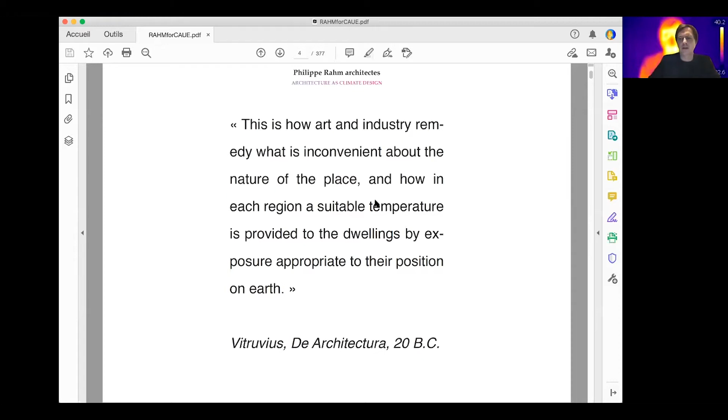Why do we really need architecture? Why are we building something? It's because we cannot live in the snow, in the coldness, and because our bodies need to keep the temperature always at 37 degrees. So the first reason of architecture is to create a shelter to block the sunlight when it's too hot, or to create a kind of microclimate around the body where you can reproduce a perpetual spring—a comfortable 20 degrees Celsius temperature around the body when it's very cold outside or raining.

So this is really the fundamental reason of architecture, the cause of the construction of buildings. I think it's very important to remember that today, because sometimes we lose the fundamental reason of something, so coming back to this climatic reason is something very important.

And then, so we can—sorry, I don't know what happened. Welcome back. Yes, sorry, okay, so I will continue.

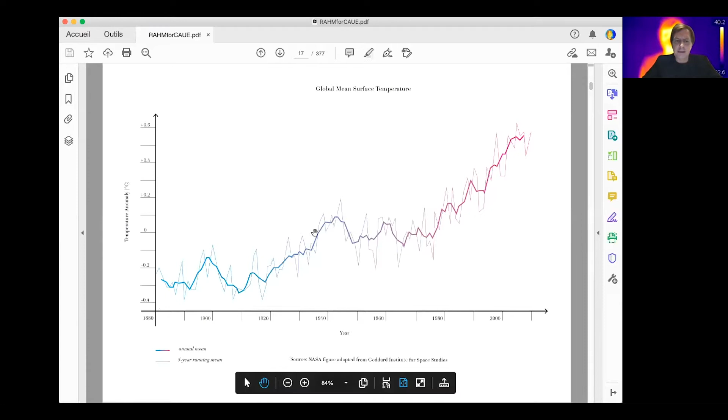So the beginning of when we start to emit CO2 by burning coal, then gas and petroleum, that produces emitting CO2. This was the real measurement of the temperature on the planet, on the atmosphere, and we can compare it with the CO2 emission that we can also measure since 1950. We have a real measure of the CO2 quantity in the atmosphere, which is more than 400 ppm today. Before that, in ice cores, we can also measure the quantity of CO2 inside the atmosphere. So there is this link between CO2 emission and global warming.

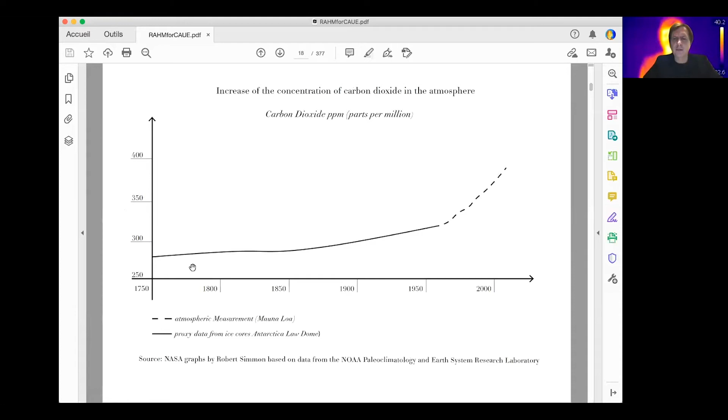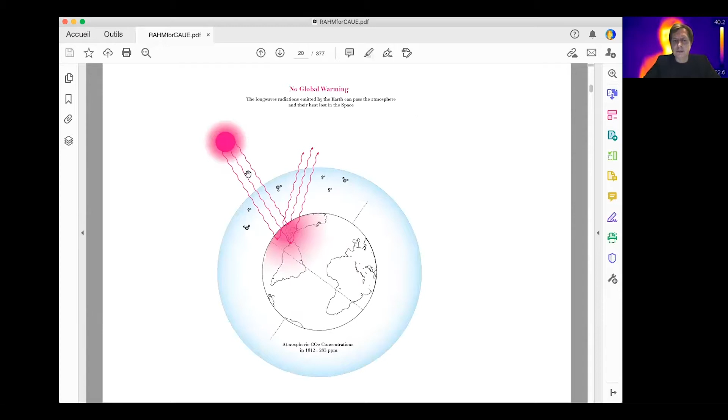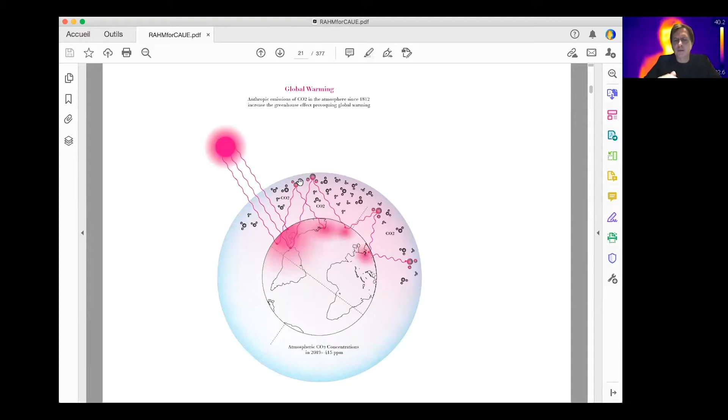And this is what we know from John Tyndall. John Tyndall, in 1850, showed that CO2 is transparent in the visible spectrum, but it's opaque in the infrared. And this is what happens: during the day, the Earth receives heat from sunlight and starts to heat up the planet. Then during the night, it re-emits some radiation, but this is no longer in the visible spectrum, it changes and is re-emitted into infrared. Because these infrared wavelengths correspond to the opacity of the CO2 molecule in the air, it starts to create global warming.

So the consequence of the global warming is what we all know today, the effect on environment, and then perturbations on the human occupation of the Earth, with different troubles that will grow with global warming.

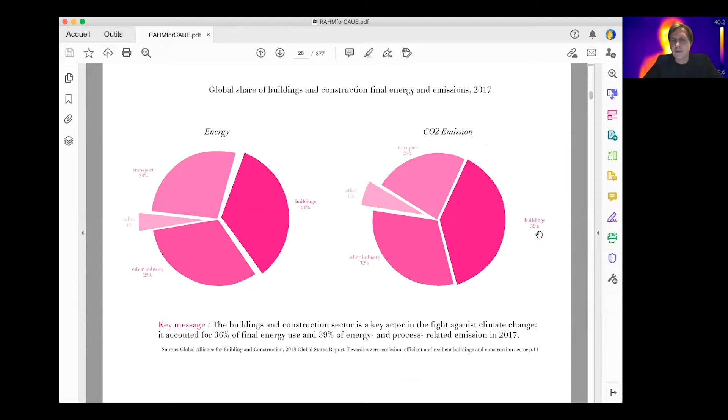So what are the conditions at the architecture scale? We have to understand the CO2 emission at the global scale - this is a repartition of the CO2 emission. We can see that buildings are producing 39% of the CO2 emission. In France, for example, people were talking a lot a few years ago about airplanes. Airplane is 2%, so it's okay, but buildings are 39%.

So it means the architects are really on the front line to reduce the emission of CO2. As architects, we are becoming political too, because we need to do something in our field, because this is the most responsible sector for creating global warming.

Then, if we look at where and when it's producing CO2, there is a new study published this year from Graz University. They did a study on 600 buildings about the repartition between building operations and material. When you burn fossil energy to heat your house, for the radiator or the hot water, it represents a large part of the CO2 emission. The material, whether wood or steel, also produces CO2, but it's only a quarter of that. So we can see here, this is quite interesting.

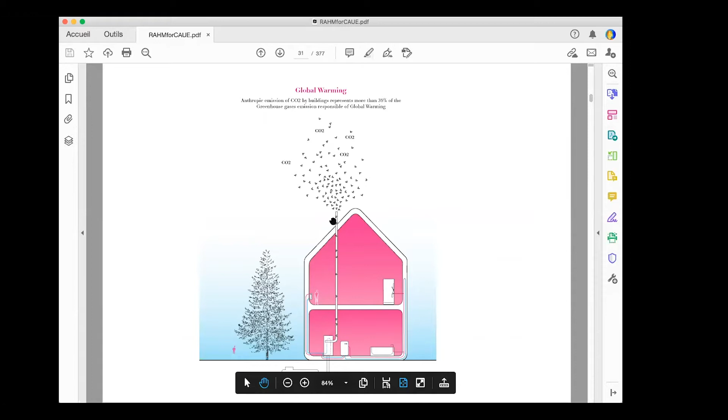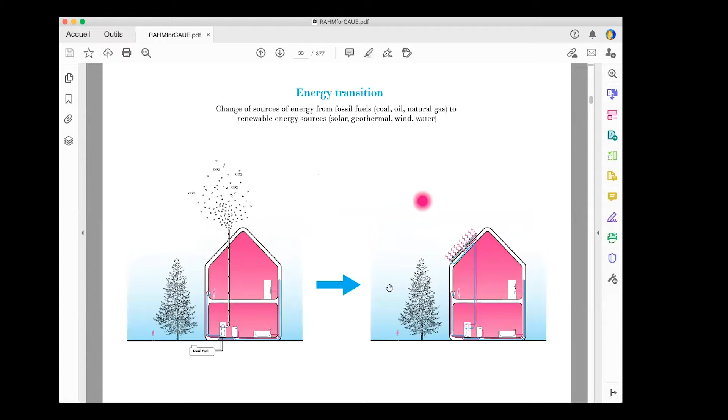But just to explain what's happened - before, or still today, we are burning fossil energy, so it produces CO2. In the future, we need to change and use only renewable energy. So this is the energy transition that we have to do. But this energy transition will take time. Maybe it can be faster, but people are talking about 30 years. Of course, I'm sure it can be faster, but why? Because today we still use the energy that we are using.

This is also a global calculation, because in Germany there is more use of coal, for example, for producing energy. And so at the global scale, it represents 85% still coming from fossil energy that produces CO2, and only 10% are renewable energy and nuclear.

So it means in the future everything should become renewable energy. But because today 85% is still coming from fossil energy, we have to decrease the consumption of energy. So there are two steps: first, we have to decrease the consumption of energy, then we have to change to renewable energy, and then we can use energy as we want in the future, because it will be no more energy producing CO2.

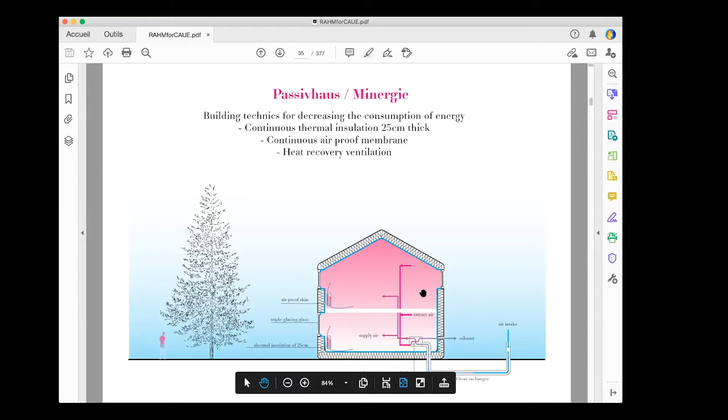So this is the Minergie Passive House standard, with 25 centimeters of thermal insulation, ventilation, and an air-proof membrane, things like that. And so in the end we can reduce a lot, and we can work on this operation part to reduce the CO2 emission, in order to reduce global warming.

So now we understand that the cause of architecture is climatic, the aim is climatic, the conditions today are also climatic. So what about the tools for doing architecture? When we are talking about tools in architecture, about composition, about form, about material, what kind of decisions can we make when we choose a form for the building, or a material?

And the two strategies that we have today are more like a geometrical strategy. We use a square or rectangle, or we like a form, and then we use addition of form, of squares, for doing a composition. And then when you choose a material, you choose it also through some cultural reference.

But in reality, why can we not also change this way of choosing material, of choosing form, through climatic parameters, and say that the means can become climatic. So this is the idea of meteorological architecture: to say the type of composition will be no more coming from geometry, but will come from meteorology, from climatology.

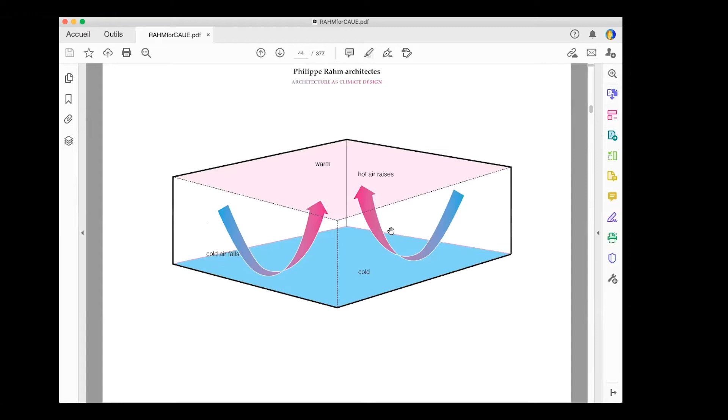The second element is convection. Convection is the fact that when the air becomes more hot, it becomes less dense, so it becomes lighter and rises to the top of the room.

And this is what happens in a normal apartment. This line represents the temperature. So it means at the foot level it can be 16 degrees Celsius, and then it can be 30 degrees Celsius at the top, under the ceiling. This is something that is quite strong.

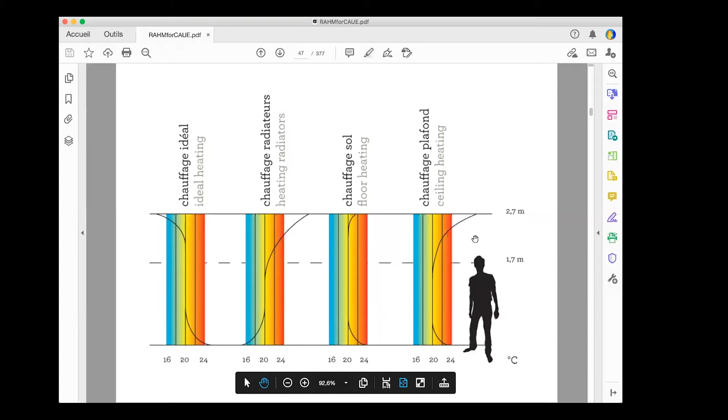So it means all this, because we are living down on the floor, we are losing a lot of energy by heating under the ceiling, and nobody lives under the ceiling. So you have a large mass of air that is very hot, and nobody uses it. It's a loss of energy because we are not heating where we need it.

And then there is also the fact that sometimes we are cold in the feet, and so we turn on the radiator, but in reality all the heat goes under the ceiling, and we still are cold at the feet level. So this is what happens today.

And so this is like a thermal representation of a section of a room. It's colder down and warmer up. So from that, we start to say, okay, we will use this Swiss recommendation, and we will use this Archimedes law of convection, atmospherical convection, and we will start to design the section linked to that.

We made a lot of projects based on this principle, but just to show with this section: here it's 22 degrees, this is more hot, and here it's more cold, and then it starts to create inside the atmosphere of the house a kind of variation of climate, and we place inside accordingly.

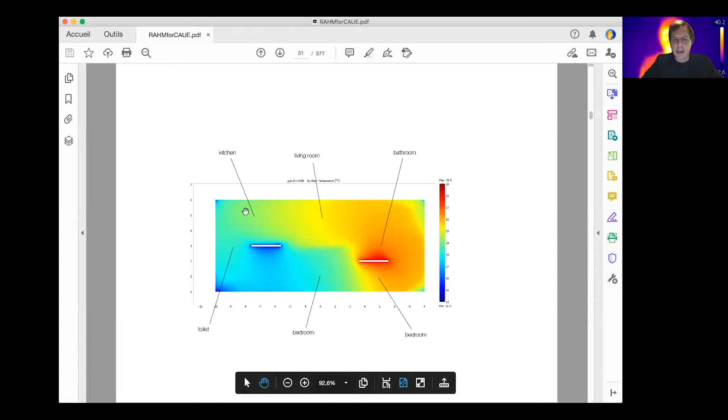We can see, okay, we can place the different programs linked to the different temperatures. So close here, we can have the bathroom, and we can have the bedroom here, the kitchen, the living room that find their place according to the temperature.

So this is what we make in this apartment in a very simple way. We know that it's more hot here and more cold on the floor. So we start to place the program linked to the temperature.

So we place the bathroom here next to the ceiling, and the kitchen down, and also there's just a funny decision about the sofa. The sofa when you are alone is a little higher than the sofa where you are two or three, because you are sharing the human warmth. So it means it can go down, and then very down we have the bed there.

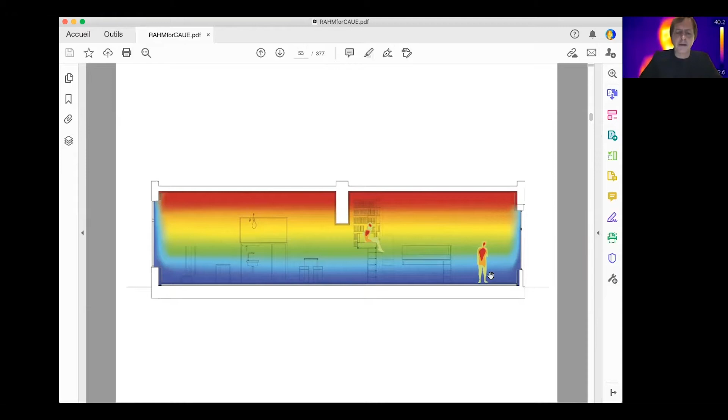Then there is another phenomenon: evaporation. We need to renew the air inside the apartment because we are producing moisture by breathing, and it depends also on the activity we have. If we are sleeping, we produce only 40 grams during 1 hour. If we are in the normal position, we are producing 150. If you take a shower, you are producing a lot.

And so it means the ventilation should be designed so that you don't introduce so much new air into the house, in order to reduce the heating of the new air that can be cold in the winter. So you will reduce the quantity of air by introducing it first in the bedroom, because there is less humidity, and then it goes to the living room, and then to the bathroom.

So it means that there is a kind of wind inside the house that is linked to ventilation, but it's good that the wind is always in this direction and not in this direction, because you don't want the bathroom moisture to go to the living room, or the toilet smell and odor to go to the living room or bedroom. So this is what happens.

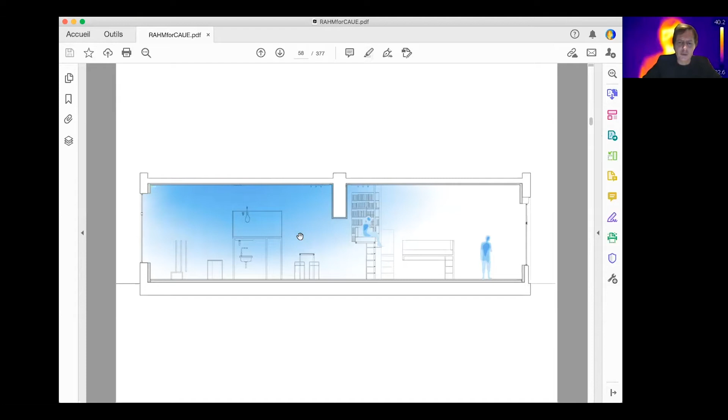So in the section we do something like that from the area here, and so this is like the wind is going like that.

So this is some view of the apartment with this. We use the verticality of the space for placing the different functions inside. Here we can see the ground of the bathroom. We have a grid that lets the air always go through. We don't have to block the air, so the air has to move freely everywhere.

And so this is some image of that. We can see here the shower, and that is on top of the kitchen.

And yeah, some view of the apartment.

Okay, now another project based on radiation. So all radiation can become the design tools for doing the plan of the project.

This is an exhibition space for the Luma Foundation in France. This project was made in an existing building of 2,700 square meters, with a skylight here.

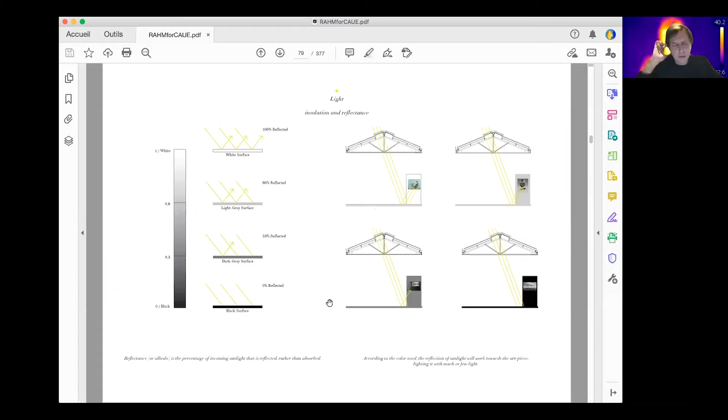So if we're talking about light, in reality there are two types. First, the insolation light, which comes from the skylight. Then we have the reflectance - depending on the color of the ground, if it's black it will absorb everything, and if it's white it will reflect a lot.

This means you can double the quantity of light by using a white floor, or decrease the intensity of light with a black surface, and in between you have a kind of gradation.

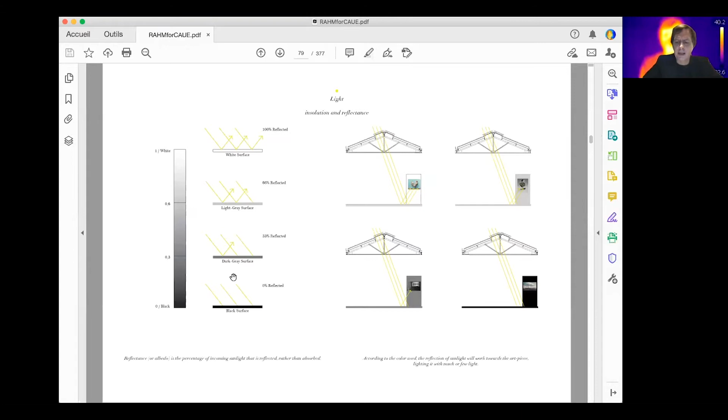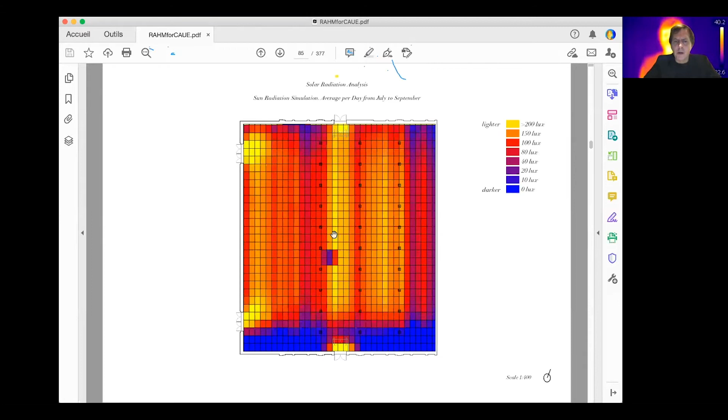And from that we transform it into a line, following the gradation - the gradient light where it's very yellow becomes that, then lighter, darker, black in the dark area.

And from that, we transform the type of floor - where it's very bright we can have a lot of light and increase it by adding a white floor. When it's already dark, we increase the darkness by creating a black floor.

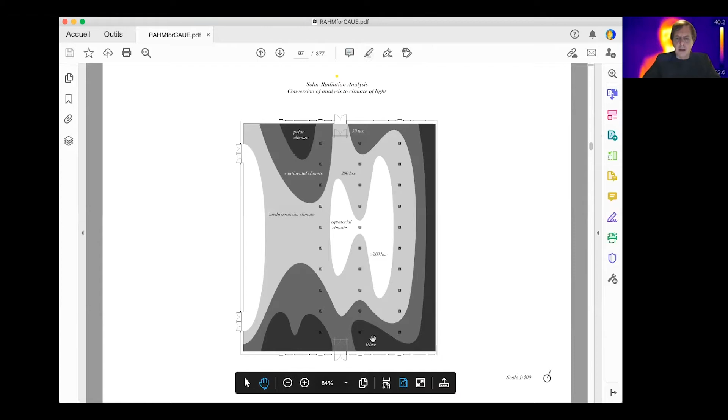So we transform this into a line, and then we have the section. The wall also follows the same principle of color.

And this is some view of the space at the end, with this variation of light linked to the different types of color of the ground.

In reality it was quite strong - it became very bright when it's white and receives light, and it was also working from a thermal point of view. It was not really what we wanted, but it was really interesting.

It was a little like going under the sun and going more into the shadow. It was like creating a kind of natural landscape with different light qualities.

And all the artwork have different types of light quality corresponding to the artist's will, or to the type of material.

Another point - here I was talking more about form, how to design the form of the plan or the section linked to meteorological phenomena. Here we are also working on the choice of material linked to some climatic value of the material.

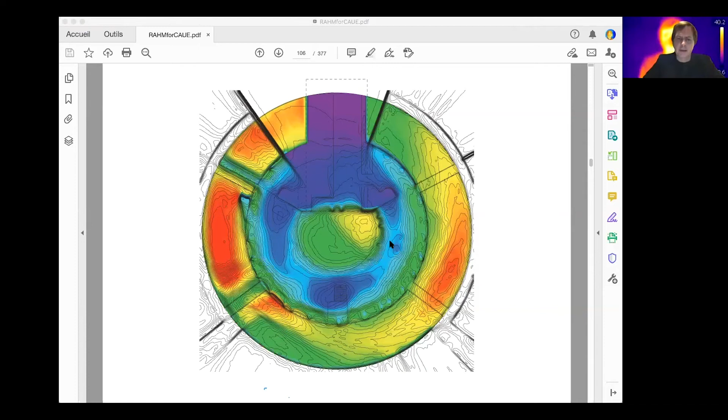So we say, in reality, the cafe cannot have a single place. It should be a gradation of atmosphere - a hot location for the winter, and a cold shadow location for the summer. So we made the average of the light, the incoming light in this space, and then from that we transform it into some lines, following the geometry of the building.

And then we start to create some different areas. So the space is defined by following the different zones - where it's green, it's more light, than where it's blue, where it's more shadow.

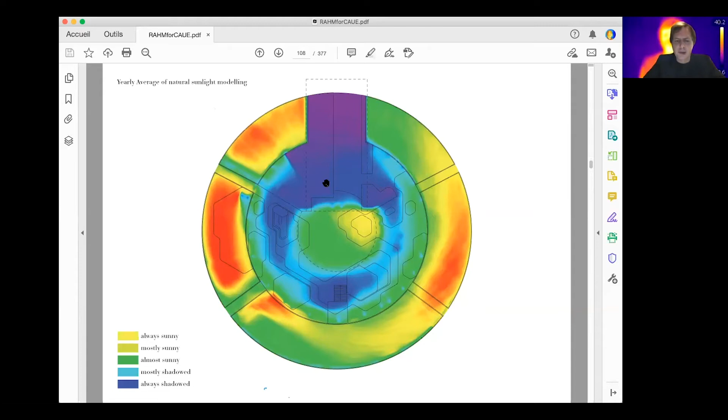And then we transform this line, this form, into the choice of material by saying, okay, in the winter, where there is more light, I want to have material that has low effusivity, so that I can keep my heat on myself. And in the shadow area, I will use a higher effusivity material. So this is the choice of material we have.

We create this gradation between metallic and stone and wood and wool. And of course, when you touch wool you feel it warm, and when you touch steel you feel it cold. So this is the decision of the material, and it's interesting because if you look to the history of architecture, you can understand that the choice of marble in the Italian church was also a decision of cooling, by effusivity.

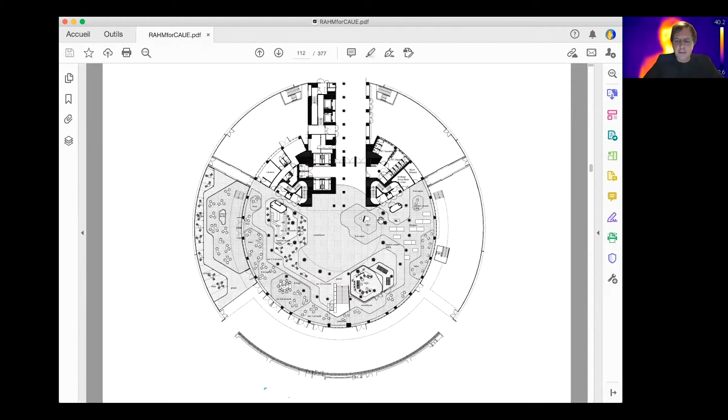So this is a plan. You can see the form of the different areas that are following the light distribution inside the space, and each line corresponds to one material - like the wool, and then the wood, and then rubber and stone and metallic material. So we can see now some images of the project with this wool area and wood.

And then we also decide, okay, this is the type of furniture that is protecting furniture, and then you move to the stone area where it's less light, so you are more in the shadow, and then you find the most colder area in the steel area. So what is important is that the decision of material - you choose a material linked with this capacity of cooling the body or keeping the heat of the body.

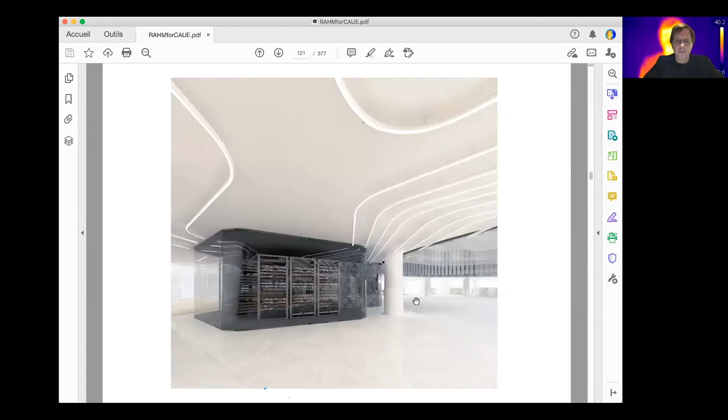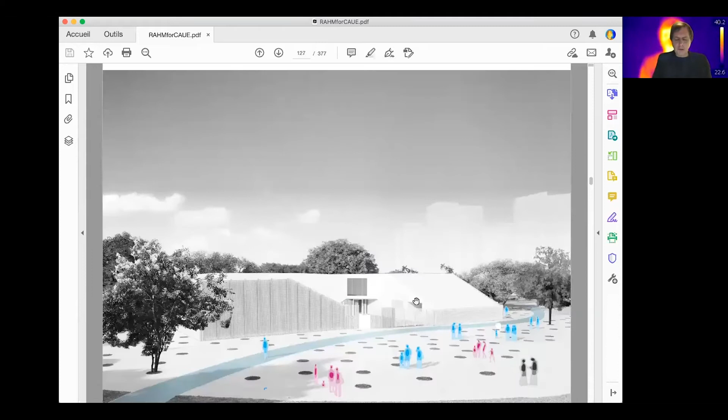Now I can talk about conduction. Conduction is more linked to thermal insulation, but today when you are talking about a wall between inside and outside, before it was one material, but today it's no more one material. It's made of thermal insulation, vapor barrier, rain barrier, load bearing structure, or a screen, some physical barrier. So in reality, the wall today is composed of a lot of layers.

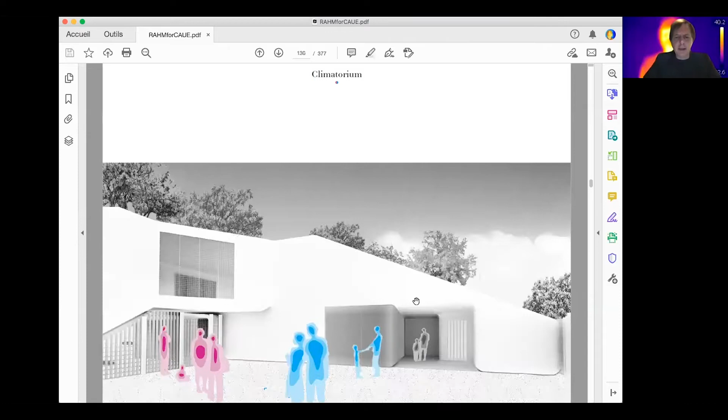And what we propose in this building is - normally everything is together, inside and outside. And here we propose to split the space, to create some space in between. So this is a little way to start to inhabit inside the different layers, to find in between the waterproof and the thermal insulation, or in between the thermal insulation and the load bearing wall.

So we can see the different layers that are splitting and creating space in between - living inside the thermal insulation, or between the vapor barrier and the thermal insulation. Here we can see all the layers together, but then here there is only the grid, which is a kind of physical barrier, and then the waterproof, and the thermal insulation creating a space. And then we have here the concrete wall that is supporting all the building.

And of course, when you open some space in between the physical barrier and the waterproof, you create a courtyard. And in between the waterproof and the thermal insulation, you create some space that will not receive air conditioning in Taiwan - it means it will be only natural ventilation here. And then the air conditioning will be only in the core of the building where there is thermal insulation.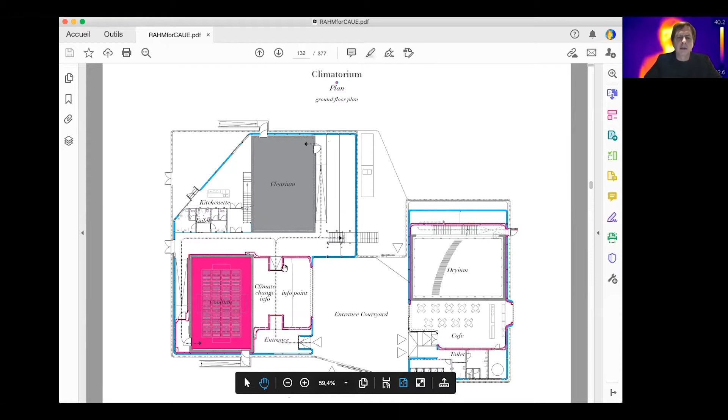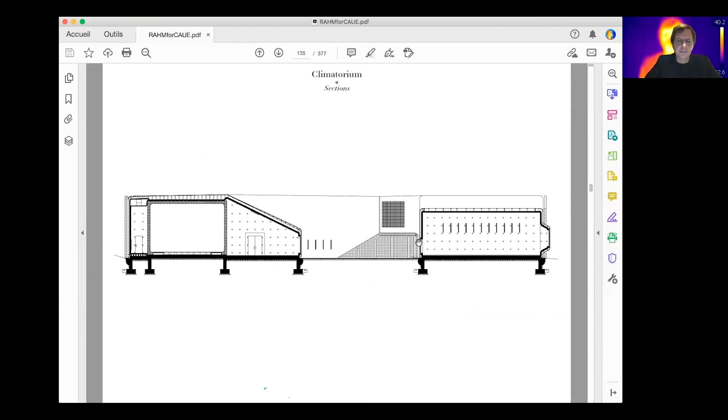So we can see it from a construction point of view. Here we can see the grid and the waterproof, and then here the thermal insulation here that stops here. Here the waterproof is continuing, so we are in between. And then the detail is like that. We have the physical barrier, the waterproof, the thermal insulation, and then it moves each from each other to open some space in between.

So the first layer is a waterproof, but it's also a kind of sunlight barrier, and we choose it with the albedo capacity, so it's white in order to avoid the overheating made by the sunlight, and we can see the building now with this white surface that is reflecting with this high albedo.

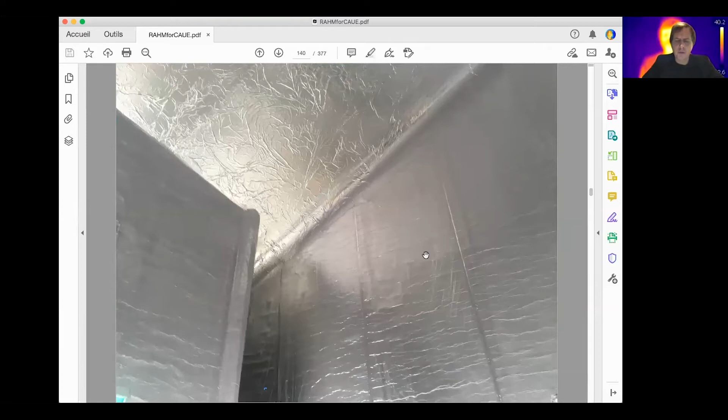And then we go inside the waterproof. We choose also the material linked to emissivity, because the aluminium here is not emitting infrared radiation, so it stays cool when the temperature of the air is warm. This is what we can see here.

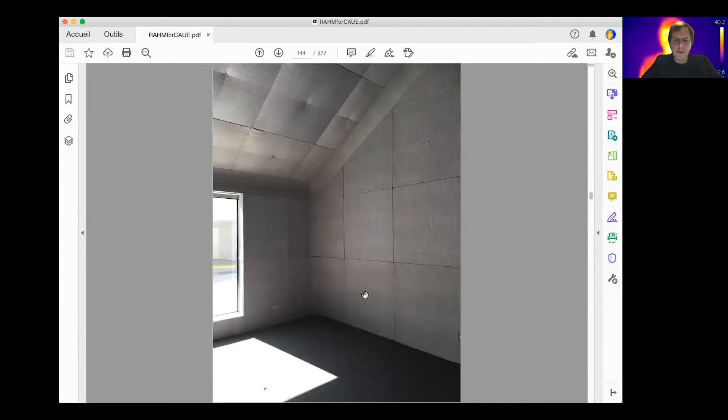And then here we are in between the waterproof and the thermal insulation. So this is all the corridor. It will be not, because it's a building made in Taiwan, in a tropical, hot and humid climate, so it will be not very comfortable here because it's warm. The air is warm, but there is only natural ventilation. But you don't stay a lot of time inside the corridor, so we can accept to decrease the consumption of energy and not cool all the toilet, the storage, the corridor, the entrance, all the space where we are not spending a lot of time. And then here we are entering into the thermal insulation inside the building.

And in this building called the Climatorium, we have 3 rooms, the coolium, the dryum, and the clearium. And these rooms are taking this issue of climatic issue, about heat and temperature with the coolium, about humidity of the air with the dryum, and pollution with the clearium.

And so what we propose is to have some kind of public space, because this building is a visitor center of the park. So it's become a kind of museum of climate, or conservatory of climate, but it's also a public space that hosts some space where you can go inside when it's too hot outside. It has a little the function maybe of the swimming pool, or the church when at the basilica - it was some cold space when it was too hot outside.

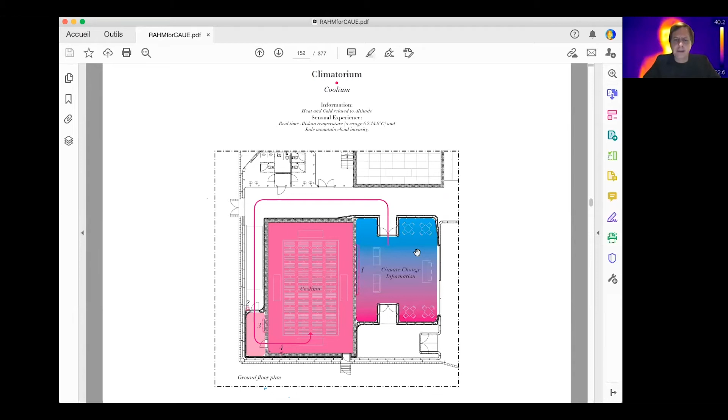And so for the coolium, we propose to reproduce in real time the climate of the mountain in Taiwan, by reproducing the light and the temperature of the mountain in real time. So it will be very cold inside this space when you will enter the space.

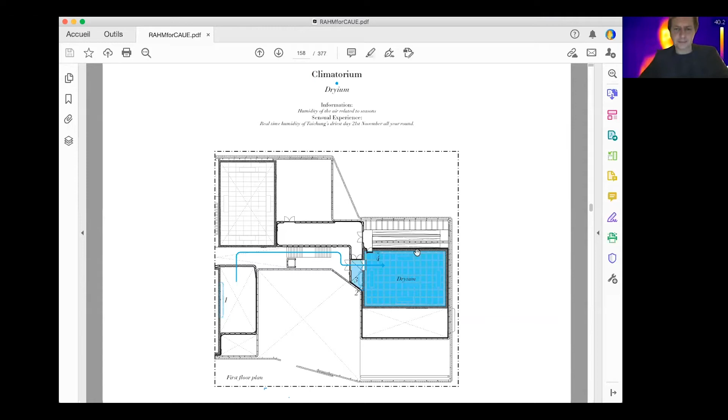In the dryum, we propose to reproduce the dry climate of the most dry day of Taiwan, so it's more in November. We can see it here. So this is like a never-ending day. So it means we propose to have a floor with a glass floor, and we do the sun pass of the 21st of November, when it's more dry, and when it's more dry, you can sweat more and you can cool the body by sweating more. So this is like reproducing every day the same day of the 21st of November.

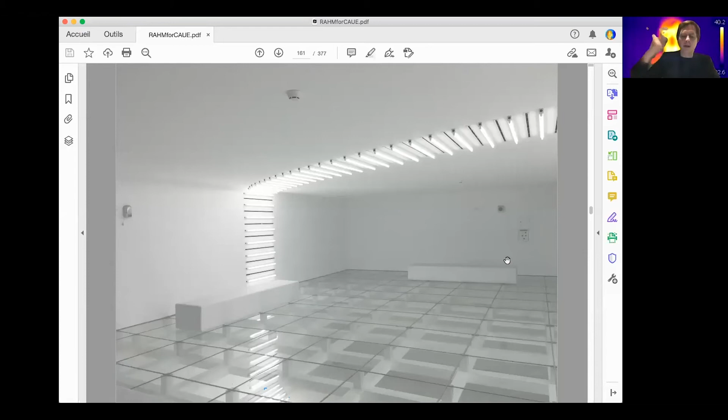If you come at 6 in the morning, it will be only this light. At noon, it will be like that, and if you come at midnight, the floor is transparent, and you can see the midnight sun through the glass.

The last room is a clearium, and here we produce the temperature and the pollution, the air quality of Taiwan, of Taichung, without the industrial pollution, without global warming. So it's been 1 degree less, because the global warming today is 1 degree more, and without PM2.5 pollution.

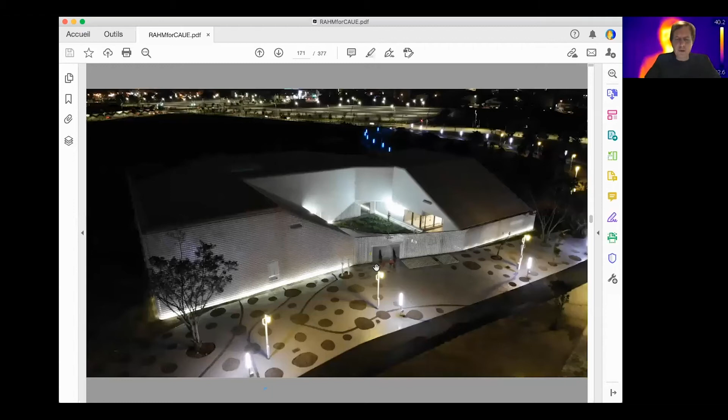So this is some view of the building. We can see here, this is the dryum, here this is a coolium, and here this is the clearium, and the coolium here.

Now I move from the architecture scale to the urban scale. First, I want to introduce the condition of today. The problem of the city today are maybe three.

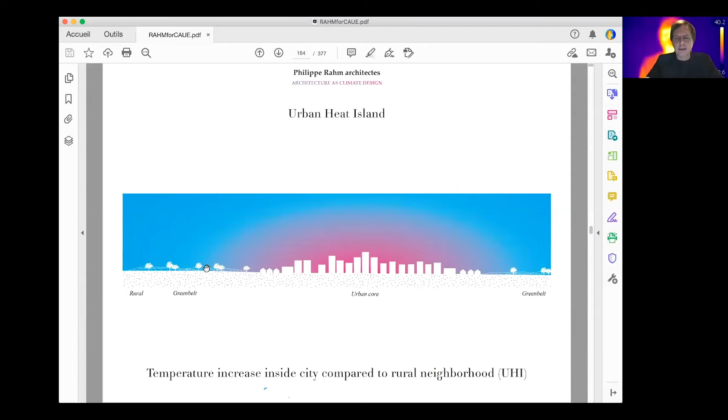The first one is the urban heat island effect. There are heat waves, and it's becoming more and more hot inside the city because of the albedo, because of overheating, because of the darkness of the road, so it's very warm during the summer inside the city when it's more cold in the countryside. This is becoming more and more important because of what happened last year or two years ago - it was very hot during the summer in the city, in Europe for example.

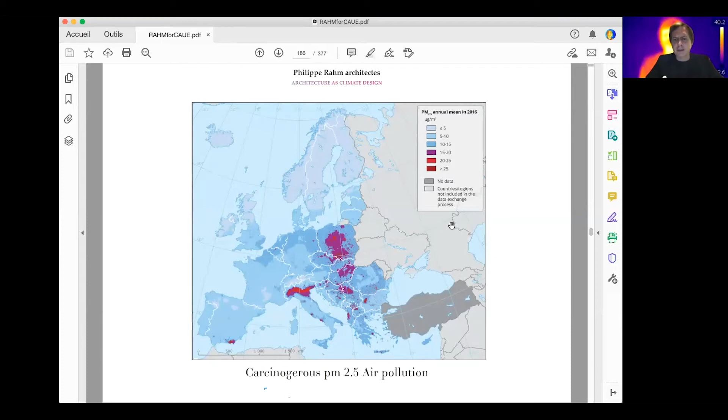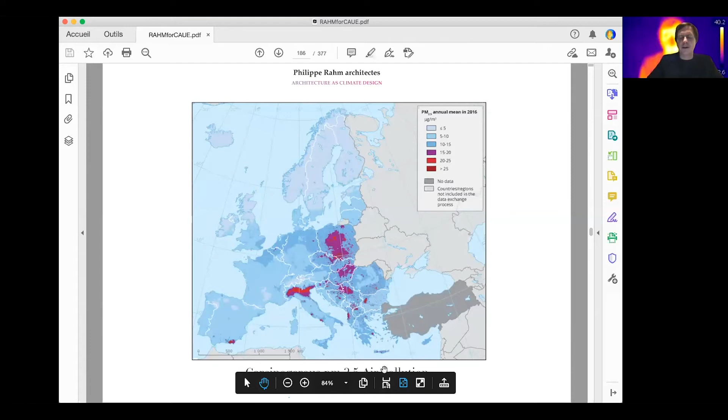Then there is some flood problem, linked to global warming that is increasing water trouble - we can see that there is an increase of flood trouble. And then there is PM2.5 pollution, emitted when you burn fossil energy. It produces CO2, but it also produces PM2.5 fine particles that are carcinogenous. Today we know this, and it's also a fight to decrease the PM2.5 air pollution.

So what are the means for that? It's still some climatic tools, but it's also some ecological tools in this case, linked to convection, albedo, effusivity, evapotranspiration, or air phytoremediation, or water management.

So now I want to present the park in Taiwan. The park is a competition we won in 2011. It's on the site of the old airport - it starts from here and finishes here. This was at the beginning of the construction.

So the master plan is based on convection, but first, when we started to design the project, we talked about what is the role of the park, because the climate in Taiwan is hot and humid - it's a tropical climate. So how to decrease the temperature, and how to maybe deal with the humidity of the air and with the pollution.

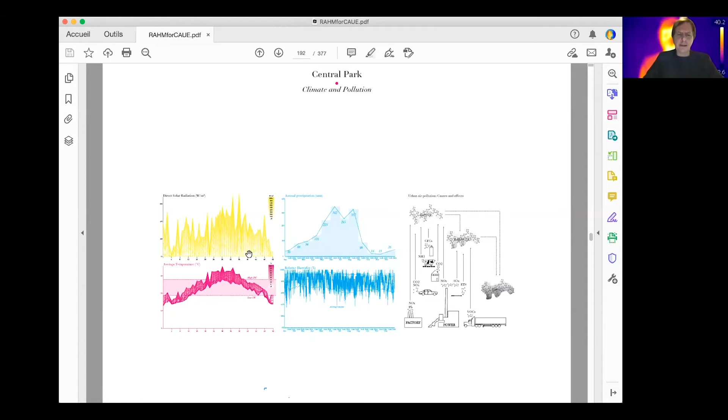These were the three layers we used for designing the park, and in reality this was also something quite traditional, because in the Haussmann period, for example with Central Park in New York, or the big parks in Paris, or other old cities, it was made also for cooling and for cleaning the air. It wasn't working for cleaning, but that was the idea. So we came back to this idea to deal with heat, humidity, and pollution in order to give people some comfortable space.

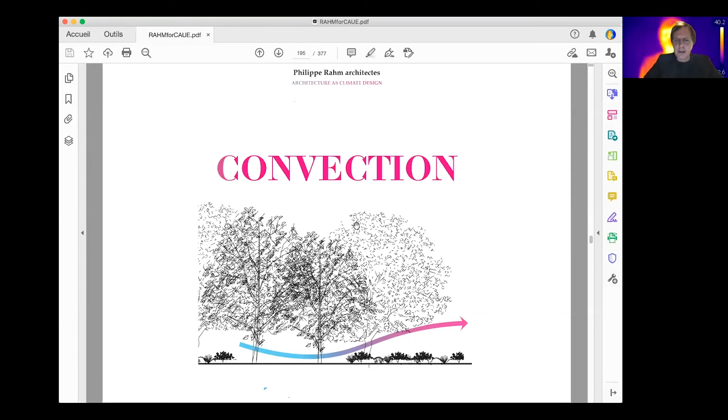The first layer is based on convection. We worked with Transsolar, the German company from Stuttgart, to do a CFD - computational fluid dynamic - model, to see where it will be more windy inside the park. Because when you feel the temperature, how warm it is depends on different factors: the temperature of the air, the humidity of the air, the direct sunlight, the emissivity of the material around you, and also the wind - because when it's more windy, it's more comfortable, like blowing on soup or blowing on your skin.

You remove the heat of your skin, and it gives a freshness feeling. All the parameters are the same except the wind, because we have a wind coming from the north that is entering the park. From that we map where it's more windy in red and less windy in blue. From the wind map, we create the composition of the plan with a natural condition that will be more windy here in the future, because we place all the future buildings of the new district. The park is 70 hectares and the new district is 270 hectares that will be built around the park. We can see here the cold area and the warmer area, with this gradation.

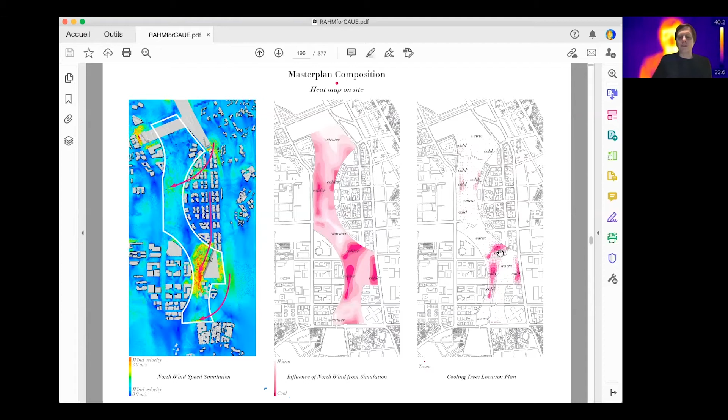Then we materialize this map, this form, with the trees, so we can see the gradation. Here there are a lot of trees every 3 meters, so it becomes like a forest, and then there are fewer trees. Of course here it will still be warm, while here it will be cold, because of a double effect of cooling - by receiving the wind, and by the shadow of the trees. Then we create the cool path that connects all the cold areas, and the activity also follows that.

So it's why I say it's no more form follow function, but it's become function follow form, and follow climate. First we design the climate, we analyze the climate, we design the climatic form, and then we find the form, and then we place the program. So this is a kind of different step of design.

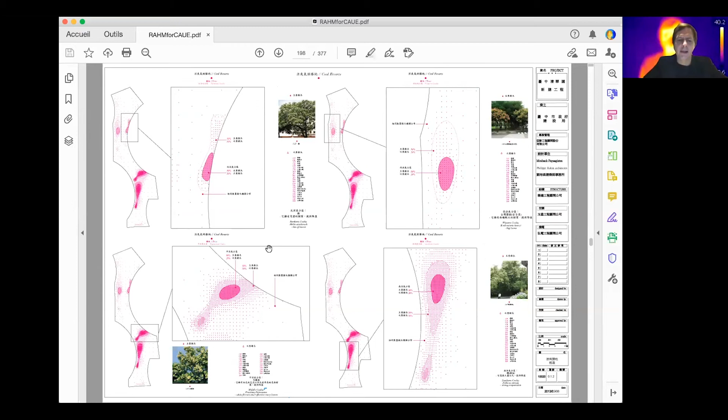So the type of trees is also linked to climatic issues. So we are choosing some trees with a lot of leaf or big leaf in order to reinforce the cooling effect, and the type of ground. And so this is like the first layer.

The second layer is based on humidity, so it's of course water management. We have to deal with all the water that is coming. So all the topography, because it was a flat site, because of the airport, we need to manage the rain, and so the topography is a consequence of the rain management, because you dig in order to create some basins to receive rain water, and so it creates a hill, and all the topography is linked to that.

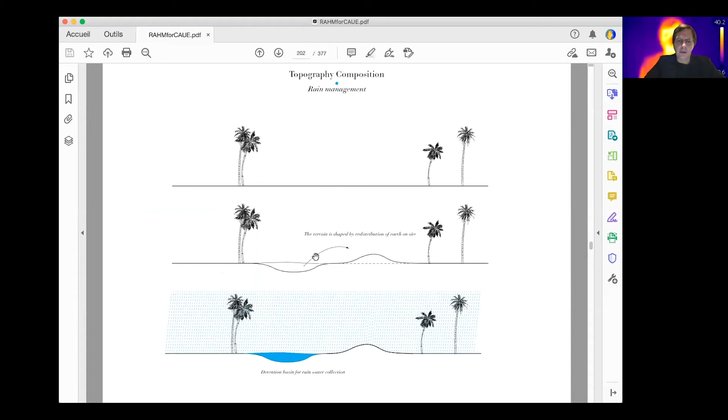So we can see the process of that, and this is what happened in the park. This is some different situations when there is heavy rain, the park can be flooded by the water. We can see the park, this was last year, already done, and after a heavy rain, we can see that part of the park is flooded by water. So the park is working like a sponge also for the rain trouble.

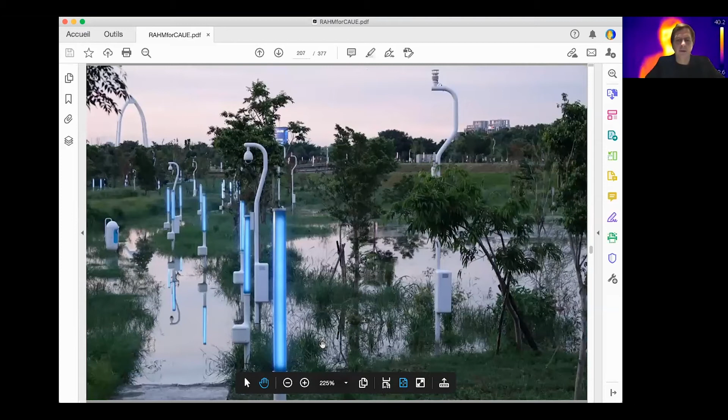On the same layers, we are also working on the type of ground, linked to the dryness, by using some dry ground. So here we can see the second path, a dry path connecting all the dry areas, and we call it a sport path because you can sweat more, so it's more comfortable for doing sport.

The last layer is about pollution. There are some big roads near the park and passing through the park, so of course it will be more polluted close to the road and less polluted far from it. So from that we say, okay, here this is a cleaner area and there the most polluted. It will be more silent, the air will be more clean. And we reinforce that by placing a lot of trees that have the capacity to absorb the air pollutants.

There are a few specific trees that can do that, and we place them in the less polluted area. So all the children's activities find their place in this more quiet and less polluted area. And the clean path is very flat, good for bicycles and for baby carriages.

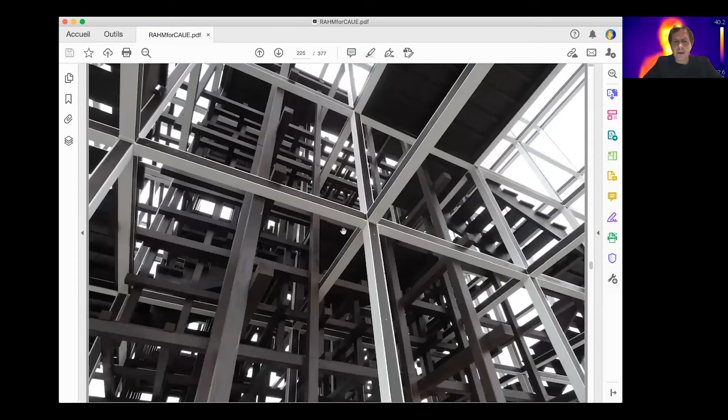It also depends on the time of day and the year - at 6 p.m. in winter, you prefer to have a little more sun, and at noon in summer, you prefer to be protected from the sun. So this is some view of the park today. We have 20 different pavilions, toilets, devices, and buildings.

Now, very quickly, something about the meteorological garden. This is an area where we have some devices that cool by convection, by evaporation, or by radiation, and I'll just show some of them. We have this anticyclone that cools by blowing cold air.

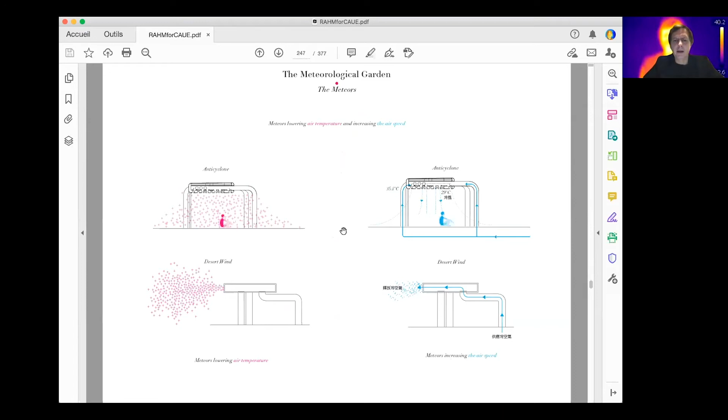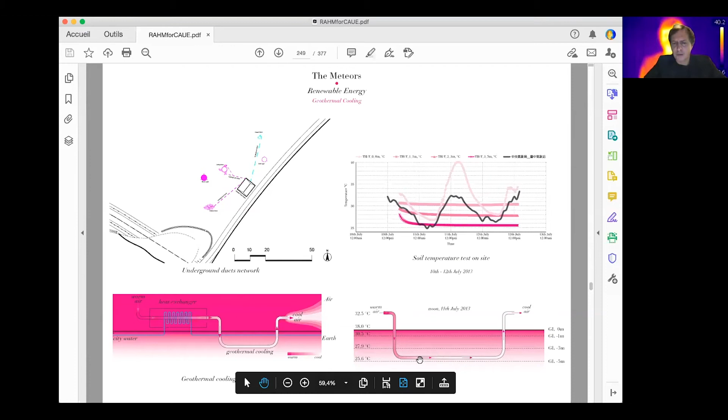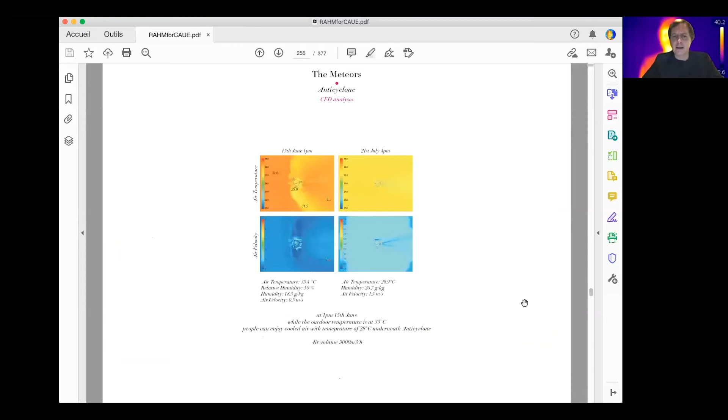All the energy of the park, we'll see that after, is produced on site. Here we propose to blow cold air by using geothermal cooling. So we take the air from outside at 32 degrees Celsius, for example, and then it goes down where it's 25, and then we blow cold air by using geothermal cooling. So this is like a kind of pavilion that creates a microclimate where it will be a little colder than outside.

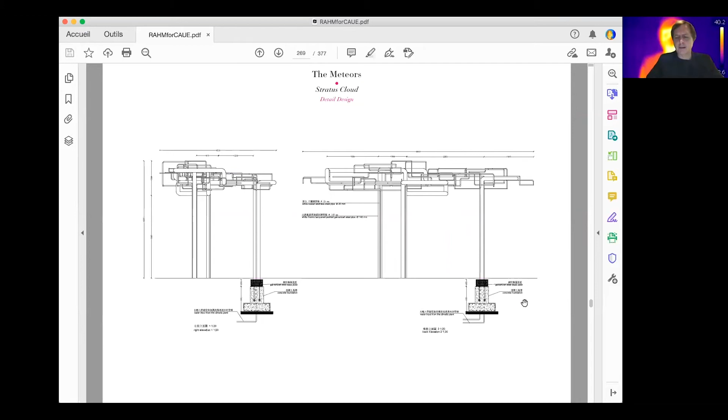Another method is by evaporation, by spreading a droplet of water that evaporates. This evaporation takes from the air and reduces its temperature, and then it cools the air.

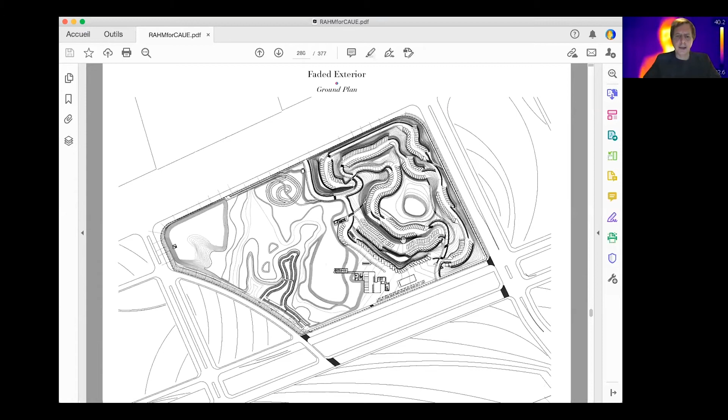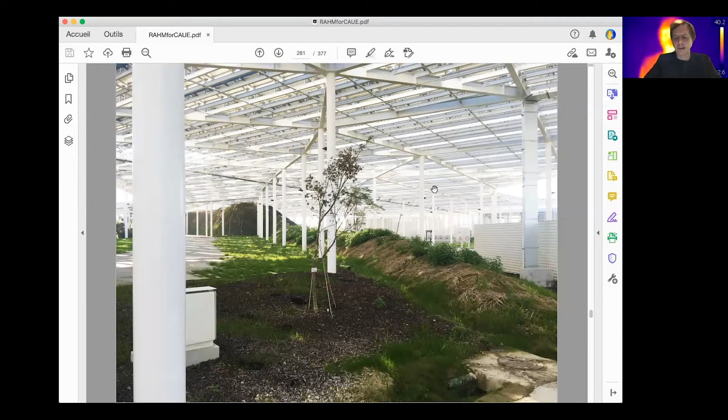Another part of the park in Taiwan is this shaded exterior. At the top we have 7,000 square meters of photovoltaic panels producing energy, and another 3,000 down on the south, producing all the electricity of the park. All the energy is made on site, we don't use anything else. We create a large canopy of photovoltaic panels under which we can find some buildings and landscape. This reduces the quantity of light, which is very hot and strong in Taiwan, and we have this new landscape behind it with some buildings.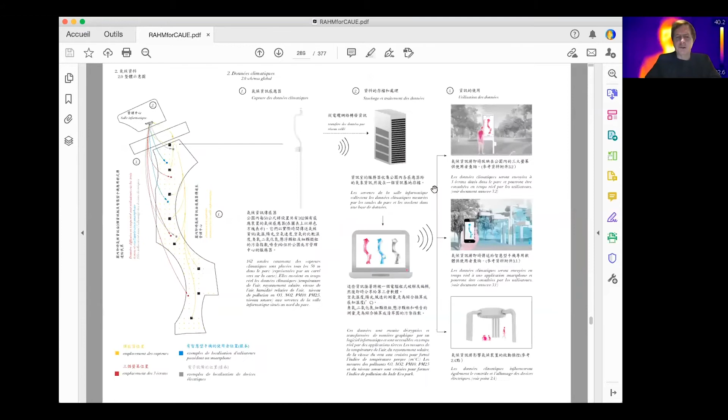I'm using sometimes some Instagram photos because... okay, and just to say that we also propose to have an app for the iPhone.

Every 50 meters we have a sensor measuring the temperature, the pollution, the humidity. We can see the sensors here. With all these sensors we can recreate a kind of climatic map in real time, like a meteorological map that changes every minute, showing where it's more or less polluted, more hot, more humid, with a kind of index. This map is accessible by iPhone, by smartphone, where we can see and decide where we want to go by following the map.

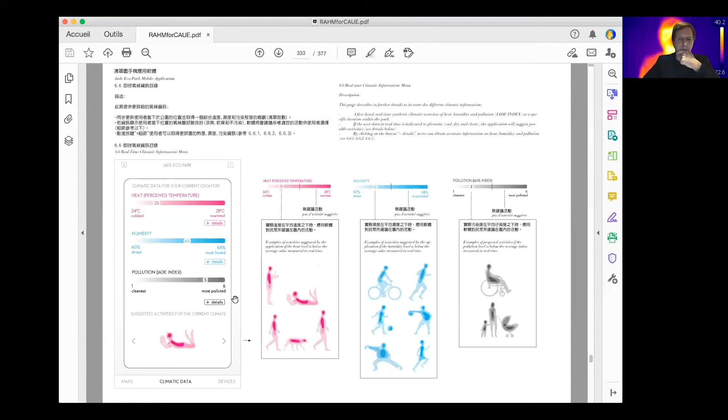And I will finish with the last project, for Milan. We made it with OMA, and we won the competition in 2019. It's for two parts of Milan, one 44 hectares and one 15 hectares on the south of Milan.

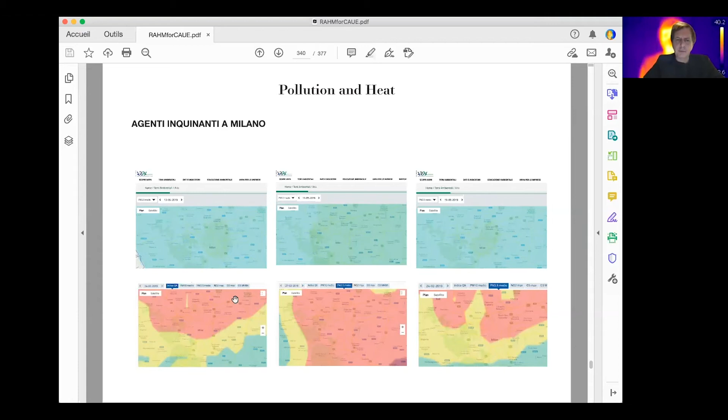The idea of the project was to think about this new district, linked to the fact that when you design a master plan, you have buildings but also public space. The idea is to reinvent the public space by creating a kind of environmental space that functions as public space but also has a function for environmental quality. First, we have to know that in Milan it's polluted and it's hot.

There is a wind coming, the most common wind comes from the southwest. This is some measurement from one day: it was very hot, the wind arrived a little colder, and because the city is very hot, it starts to heat the air. It becomes warmer as you go east, and even more so to the north.

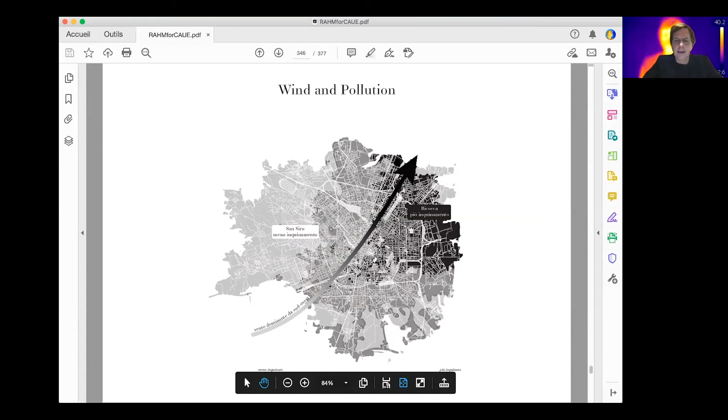This is linked to pollution too, it's the same effect. The pollution is produced by cars inside the city, then it moves with the wind. Red here is very polluted. You can see Milan, and the wind takes all the pollutant with it, so the southwest area is less polluted, the air is cleaner than in this area which is more polluted.

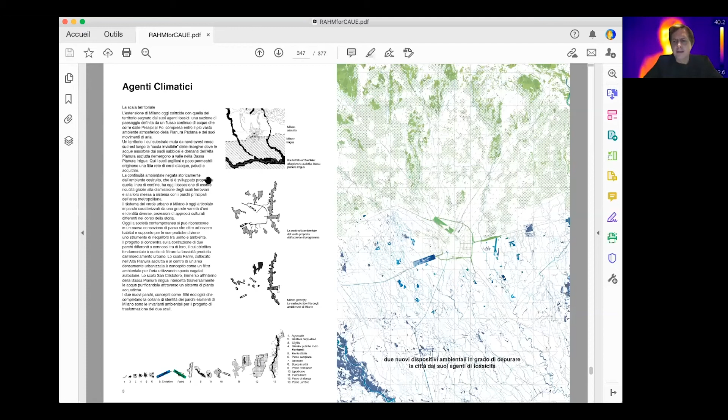So the base of the project was to create these two large public spaces. We called them the limpidarium, meant to be public but also to clean the air of the new district in Farini, and to clean the water in San Cristoforo. This is this new public space, we call them the limpidarium, meaning the space that is cleaning, this one cleaning the air, and this one the water.

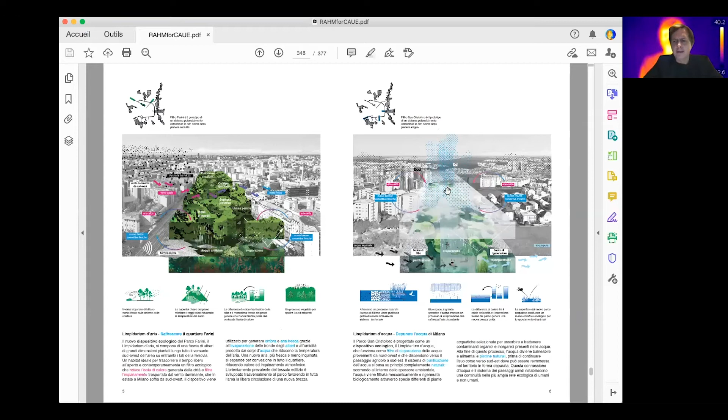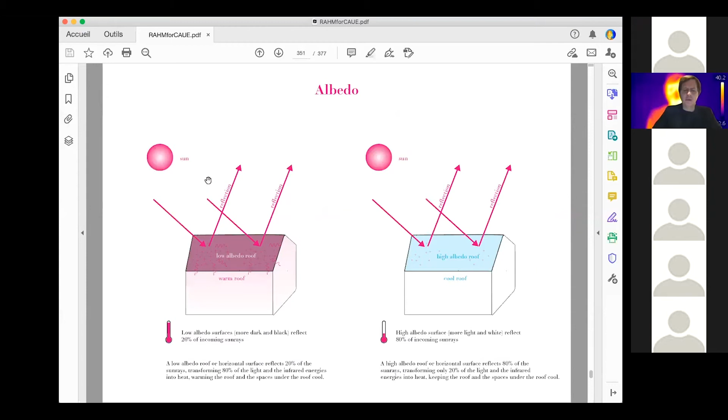So the idea of how to cool the city is to cool by convection, creating a wind between the cold area and the warm area, and also to work on the albedo, where it's more black it heats more, and where it's more white it reflects more. These are some different strategies we made there.

For the building of Farini, we propose to have a white surface. The horizontal surface is more white, but if you also have a white vertical surface it's not so good, because in reality it creates a kind of bounce effect, and the sunlight will go down and start to heat the street.

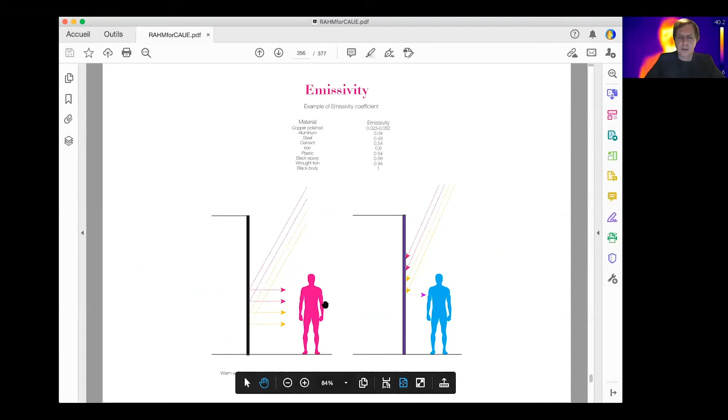And then we have an effect on the pollution that is trapped. The PM2.5 is trapped also by creating an artificial rain for when it's very polluted. We can bring down the PM2.5 with the rain. So this is a little the principle of that.

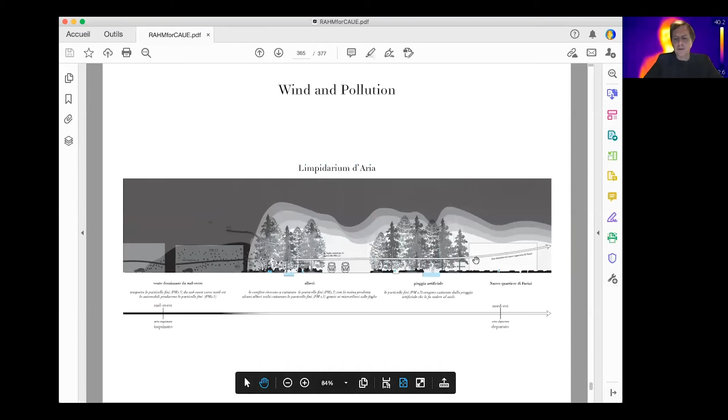So we have this new district with this limpidarium and these new buildings that are also letting the air go through here.

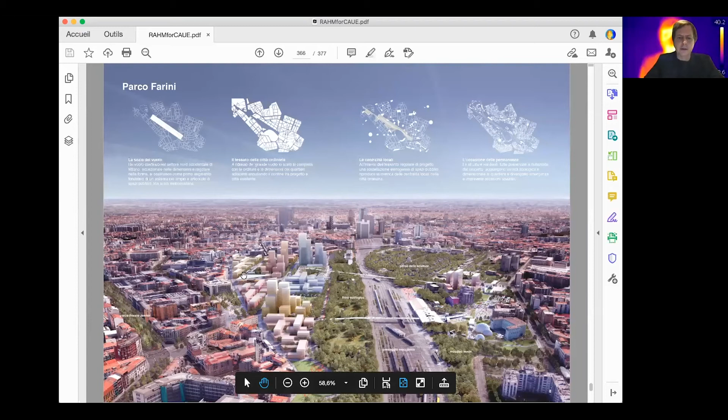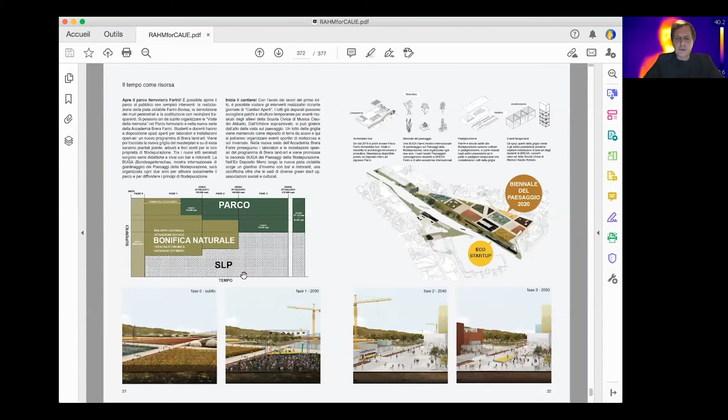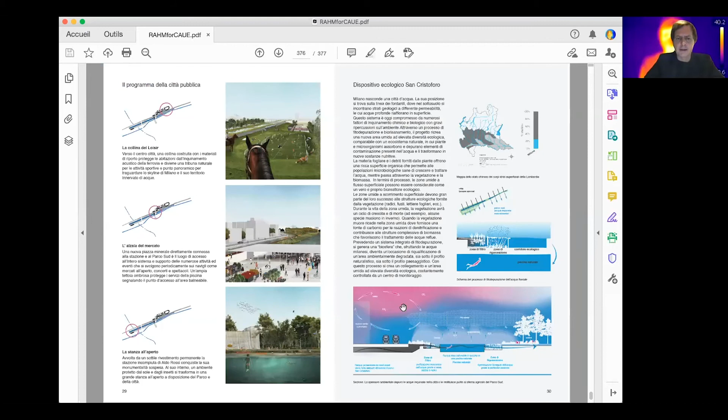And the second district is San Cristoforo. Here we propose to create a limpidarium d'acqua. The principle is this: in Milan you have a lot of underground water that can be dirty, so we propose a kind of filter that cleans the water by phytoremediation and creates a public space based on the water that can be a natural swimming pool.